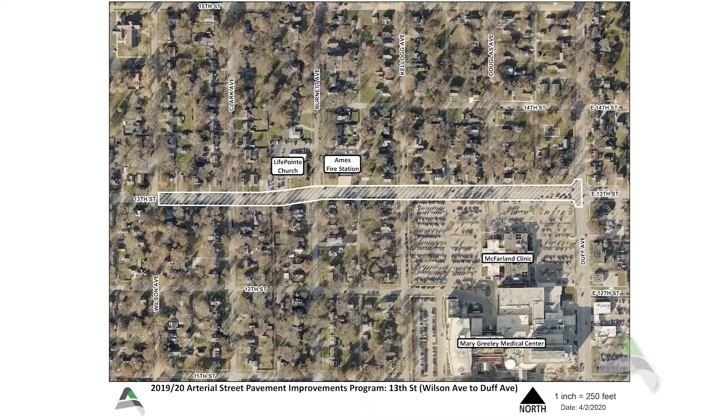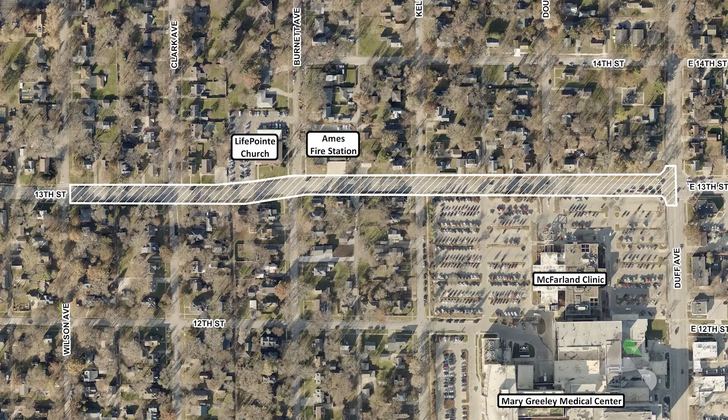This map here is a general overview of the project limits. As I stated before, we're looking to reconstruct 13th Street from Wilson Avenue to include a portion of Duff Avenue. This is a complete reconstruction, so the project will be tear out and replace of the existing street, along with some utility improvements and sidewalk ramp improvements at the intersections. Since Ames Fire Station is located just off of Burnett Avenue and 13th Street, this project will have to be split up into four different phases to maintain and provide access for emergency vehicles during the project. I'll get into more details of the phasing later on in this video.

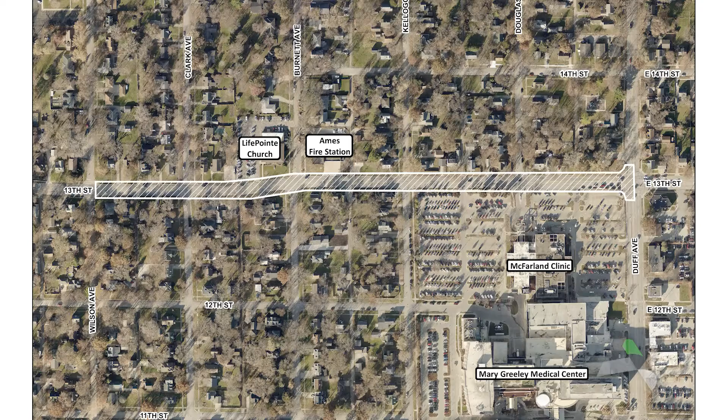So for now, I'd just like to go through some of the project plan sheets to give you an idea of what's going to take place. I've highlighted all of the water main reconstruction for this project in blue, storm sewer replacement in green, and in pink we have some sanitary sewer manholes that will be replaced.

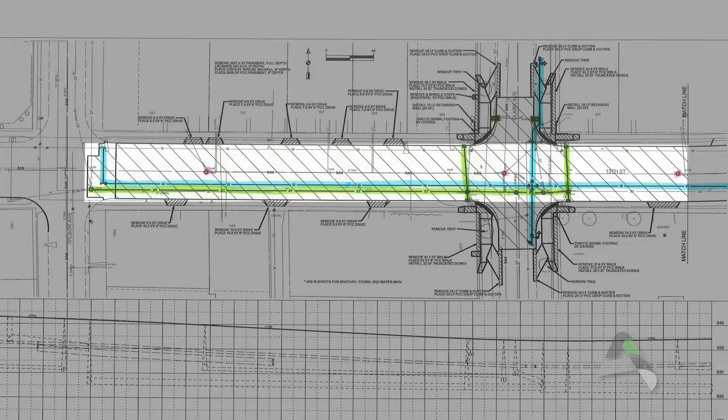This sheet shows Wilson Avenue, and here's Clark Avenue, and I'll continue on towards the east with the sheets. As you can see, all the gray here is replacing pavement. The street is going to be replaced back with the same width as it is currently - we're not widening the street. The driveway approaches will be replaced as well along the street.

At Clark Avenue, I wanted to point out there's some wider sidewalk sections here. That's part of a bike facility route improvement and pedestrian beacon that will be installed as part of a separate project that will come after this one. But as part of this project, we're going to widen the sidewalks here. These are going to be special crossings for pedestrians and bike facilities, since Clark Avenue is a bike-friendly route here in the city of Ames. We're also putting in new ADA ramps at this intersection.

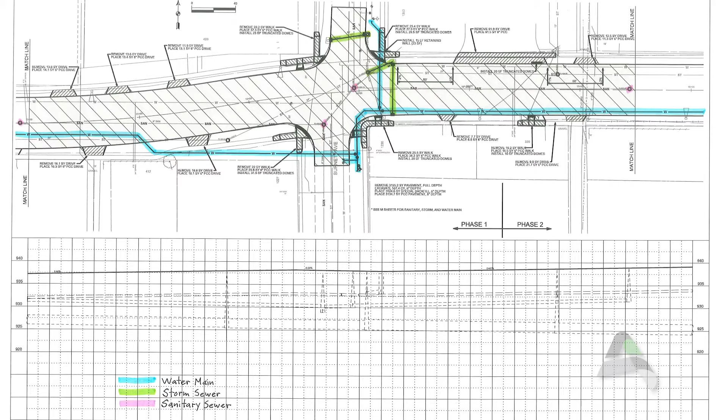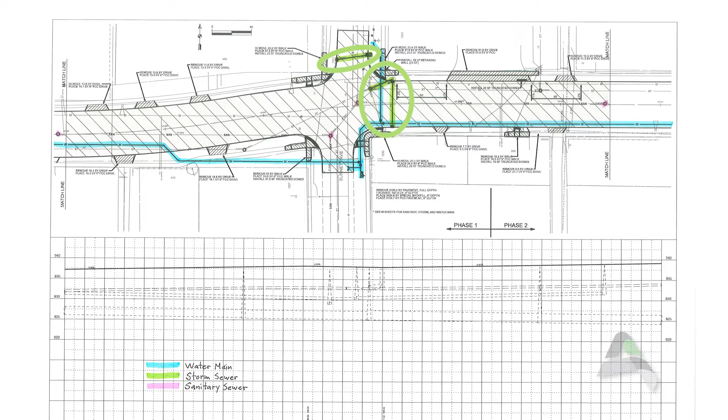Here's the next sheet, continuing on from the first one. Here's Burnett Avenue and the fire station. Again, I'll get into the phasing, but we're going to split the phases at the fire station driveway. The water main continues along the south side of the road. There's a little bit of storm sewer here at Burnett, and of course the sidewalk improvements at the intersection.

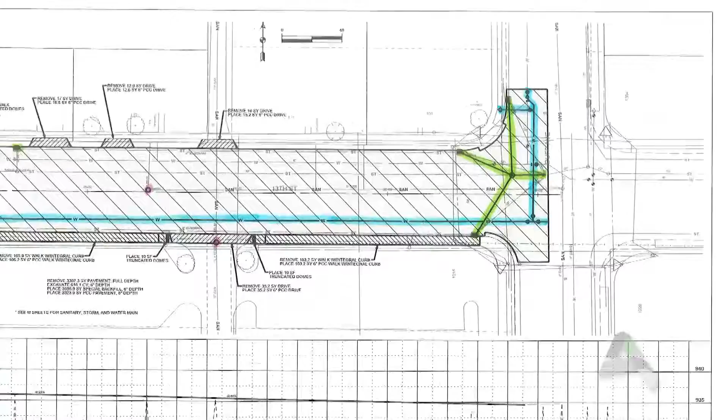This is the final block from Douglas to Duff Avenue. The water main continues and will connect into the existing water main up here. There's some storm sewer work here at Douglas and a couple of sanitary sewer manholes as well. This entire sidewalk along the south side of 13th Street from Douglas to Duff will have to be replaced as part of this project, since the street does widen at Douglas. Between Douglas and Duff, we'll have to remove and replace that section of sidewalk.

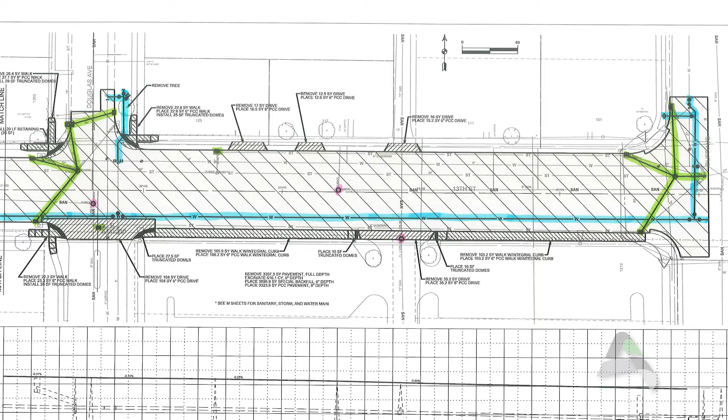Other than that, all of the additional sidewalk throughout this project will remain in place apart from the ramp improvements at the intersections. As I stated before, the water main is going to be replaced. There's an existing water main currently along more towards the north side of 13th Street. With the construction of the new water main, shown here in blue, this water main shown in black on this map will be abandoned.

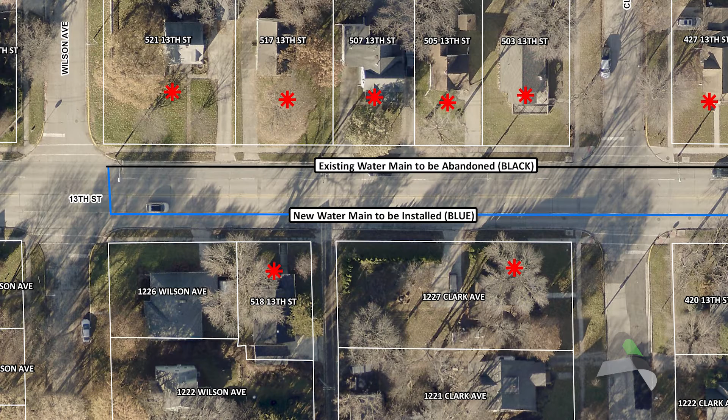This map shows from Wilson to Clark Avenue, and these red highlighted parcels or homes are the ones that, according to our records, will have to have a water service transfer as part of this project, since we're changing water mains throughout the length of this project. So I'm going to go through each block, and if you live in one of these red highlighted parcels, then we will have to do a water service transfer for you. If you have any questions on that, you can contact me.

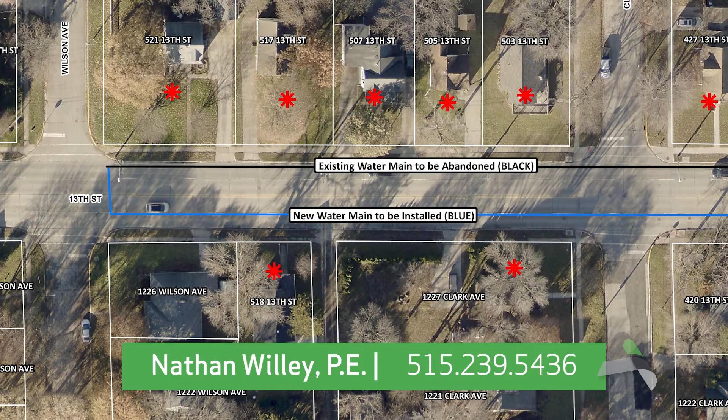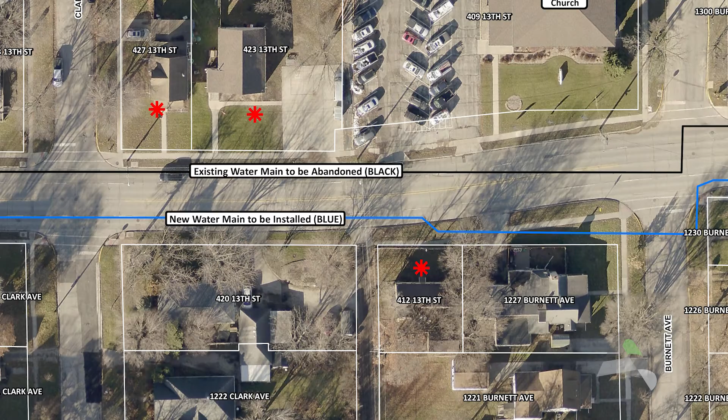So here's the next block from Clark to Burnett. Give a little bit of time for you to check that out. The next one is from Burnett to Kellogg. And here's the block from Kellogg to Douglas.

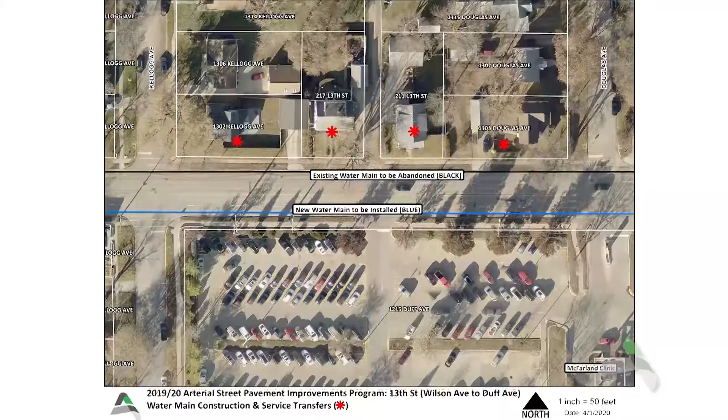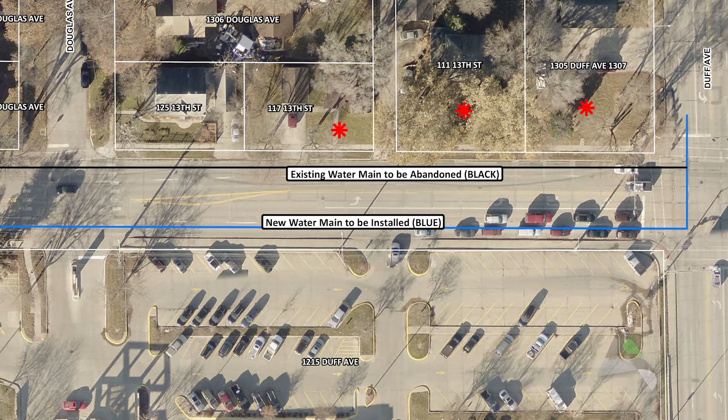And finally, from Douglas to Duff. Again, these are just highlighting some of the properties that will need to have water service transfers as part of this project with the installation of the new water main.

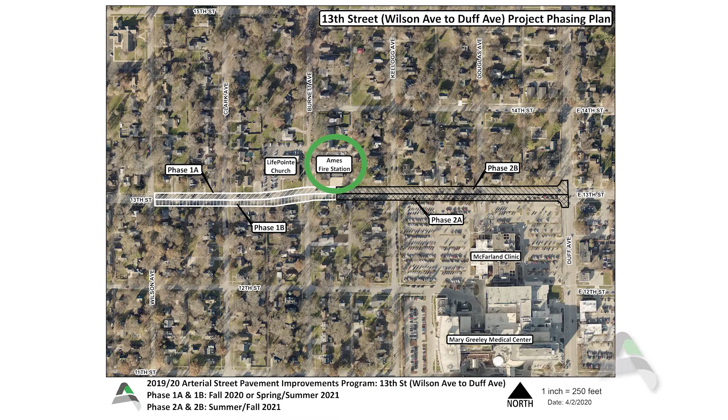As I mentioned earlier, this project will have to be phased because of the Ames Fire Station and emergency vehicle access. There will be a total of 4 phases with this project to keep at least one lane of traffic each direction going throughout construction.

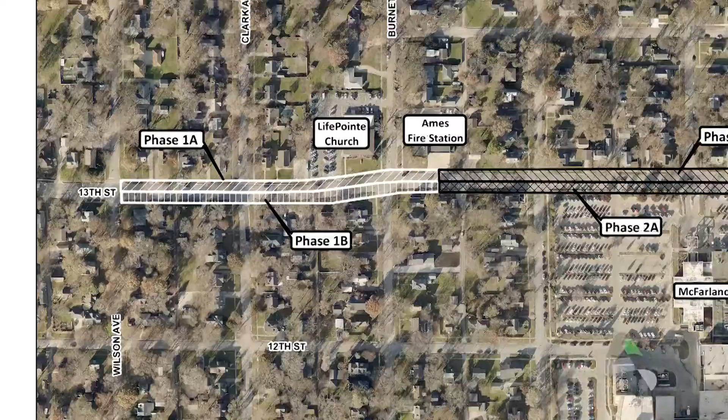The first phase will be the north half of the west half of the project, called Phase 1A. Phase 1B is the south half. Phase 2A will be the south half of the east half, and Phase 2B will be the north half of the east half of the project.

It is a bit confusing to explain at this point, but basically we'll be tearing out Phase 1A, leaving traffic on 1B, and then flipping that over, tearing out 1B and allowing traffic on 1A. Then the same on the east side with Phase 2A and 2B.

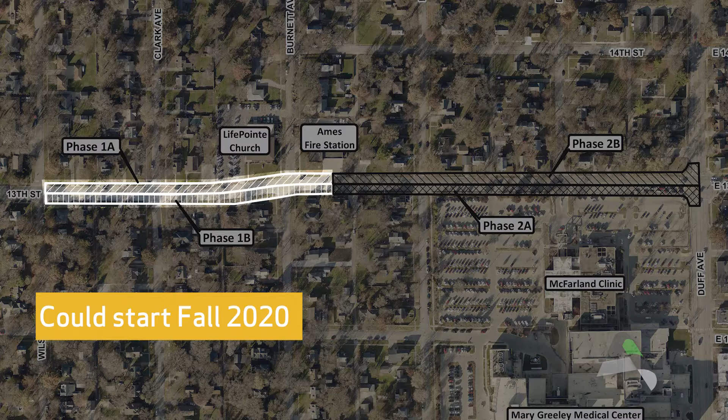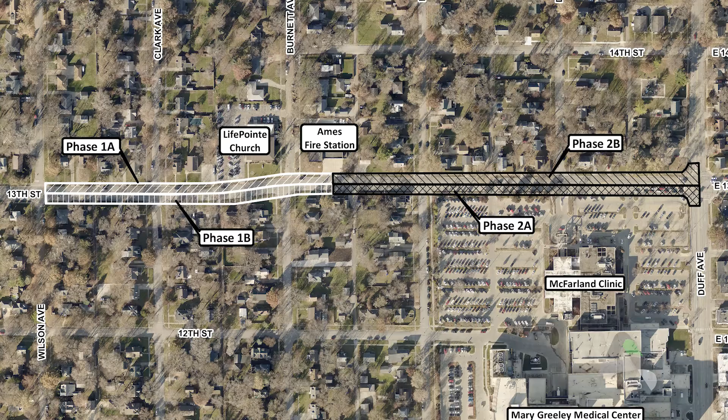Right now we anticipate starting this project as early as the fall of this year, but possibly going into spring and summer of next year, starting with Phase 1A and B, and continuing on with Phase 2A and 2B after that, which would probably take place next summer and fall of 2021.

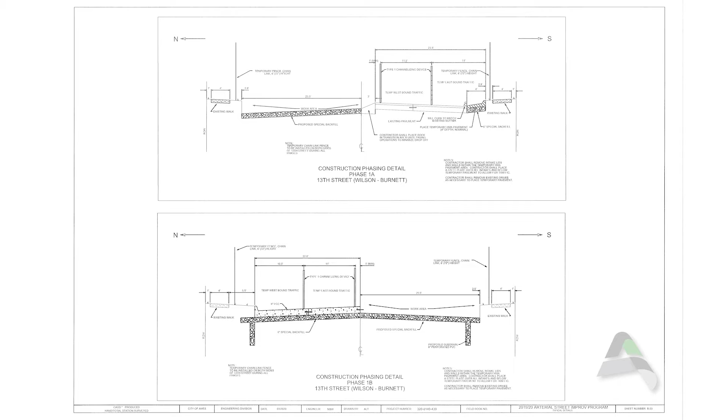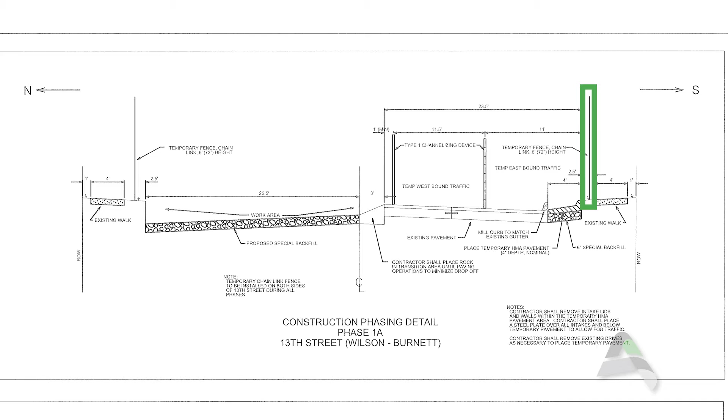Here is an example of one of the phases and what that will look like. For example, Phase 1A would be tearing out the pavement on the north side. We'd be adding some temporary pavement on the existing in order to give us wide enough lanes for two-way traffic. We'd have channelizers delineating each lane for safety, and also a chain link fence between the sidewalk and the temporary pavement so that pedestrians can continue to use that sidewalk safely.

We'll also have chain link on the other side of the road as well. This is generally the pattern to be followed for all phases throughout the project.

Going back to this phasing map, just wanted to cover a couple of items. When we have these phases shut down, we will have no access to side streets or alleys directly to 13th Street, and that is just for safety and congestion of traffic as it's flowing through. So we'll be shutting down the side streets along the section that's been closed off, just so we don't have turning traffic and congestion in those areas.

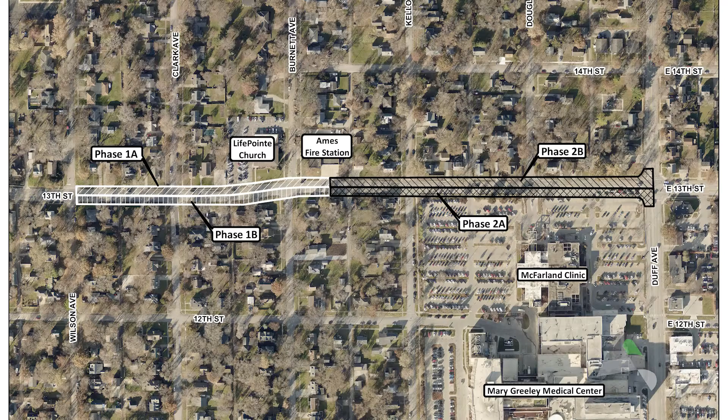You will still have access from the side streets to your homes, so we don't anticipate any interruption to mail or garbage service with this project.

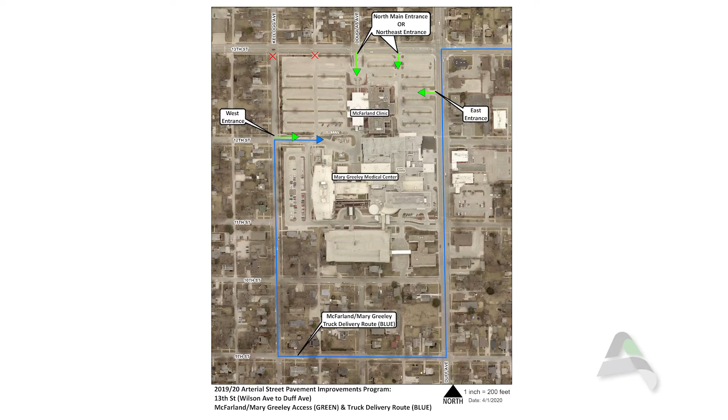With that, I'd like to touch on access to McFarland and Mary Greeley during Phase 2 of this project. As I stated earlier, Kellogg and the alley here and other alleys will be closed off. However, we are going to keep the north main entrance open to customers of McFarland and Mary Greeley as long as possible during the project.

When it comes time that we have to replace this intersection, we will open this northeast entrance temporarily until this one is ready to be reopened. So there'll be at least one entrance on the north side open at all times during this project. Other alternate routes into McFarland are from the east and from the west.

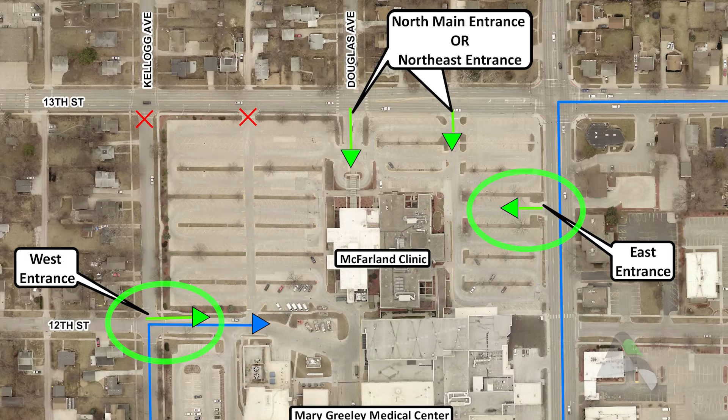Just as an FYI to those of you living in this neighborhood, truck traffic will need to be rerouted on the blue line and come in down Duff, turn at 9th Street, and then up Kellogg, because Kellogg Avenue will be closed at 13th Street. They'll, of course, exit the same way that they came.

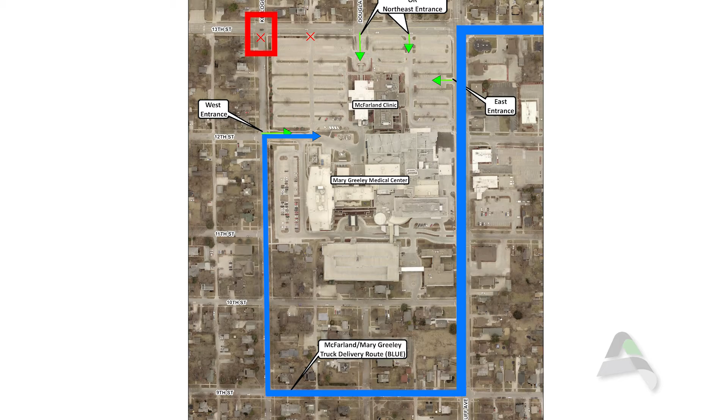Finally, this project was originally programmed to include on-street bike facilities. However, after following the guidance of our recently adopted Complete Streets Plan, it has been determined that alternate parallel routes should be utilized for bikes due to the relatively high vehicle volumes and speeds along 13th Street.

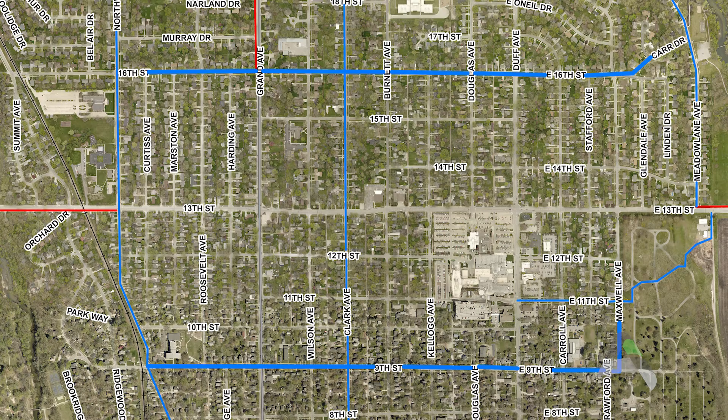Therefore, 16th Street from Northwestern Avenue to Meadow Lane Avenue has been selected as a parallel route to the north of 13th Street, while 9th Street from Northwestern Avenue to Maxwell Avenue has been selected as a parallel route to the south of 13th Street. This project will include signing both 16th and 9th Street as bicycle-friendly streets in conjunction with this project.